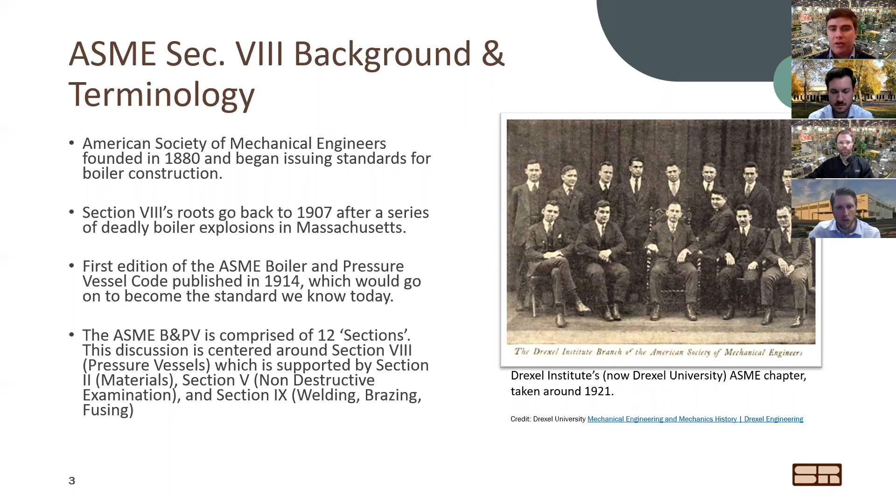So the Boiler and Pressure Vessel Code today is comprised of exactly 12 sections, one of which is Section 8, which we'll be talking about today. And it's all interconnected. There's some pulling in from other sections that may affect Section 8, and we'll touch on that later on in the presentation. Like we just said, here are the 12 sections of the ASME Boiler and Pressure Vessel Code. Section 8 we have called out here, and you'll see that there are 3 divisions within it. And we'll also touch on that as well.

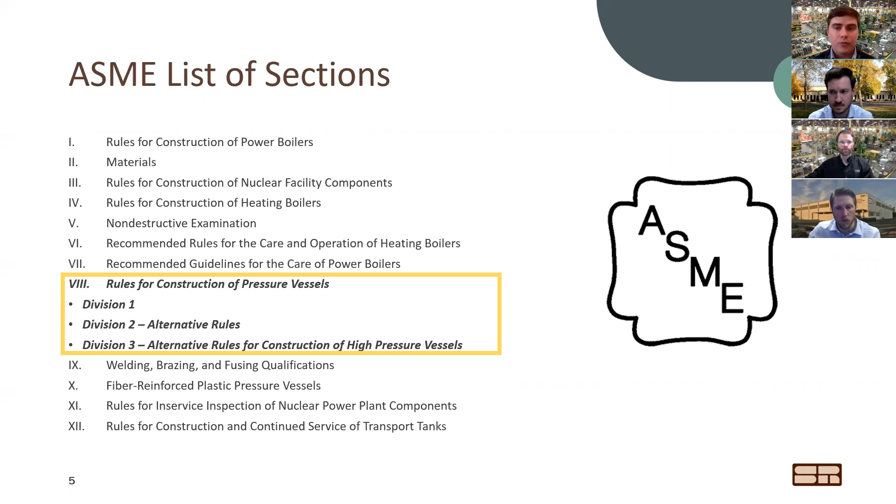So, for this one, I'm going to turn it over to Adam for some more terminology and background. Why don't you go ahead there, Adam? Right. So Nate mentioned that this pressure vessel code has been around for over 100 years now. So it's evolved, and can be considered a mature code at this point. However, they still release editions every 2 years. This allows for new technology and material science, new welding procedures to be incorporated, and also allows them to make any corrections or modifications to the analysis. For many parts of the code, much of it looks the same as it did back in the 70s and 80s as it does now, aside from minor formatting changes.

So with Section 8, we have U and UM stamps. This is on the nameplate of the vessel. Other sections have other letter designations, such as a letter S for Section 1 steam boilers, letter N for Section 3 pressure vessels for the nuclear industry. Right now, our current edition is 2019. The new edition, 2021, is being released in July, which then comes into effect January 1st, 2022.

So for the sake of brevity for this discussion, we're focusing on ASME Section 8, specifically Division 1. Division 2 and Division 3, we're not going to go into too much detail. But Division 1 is a recipe-based set of equations for design. Division 2 gives design engineers more leeway to design around specific applications that don't fit the code as well. And then Division 3 is for high pressure vessels over 10,000 PSI.

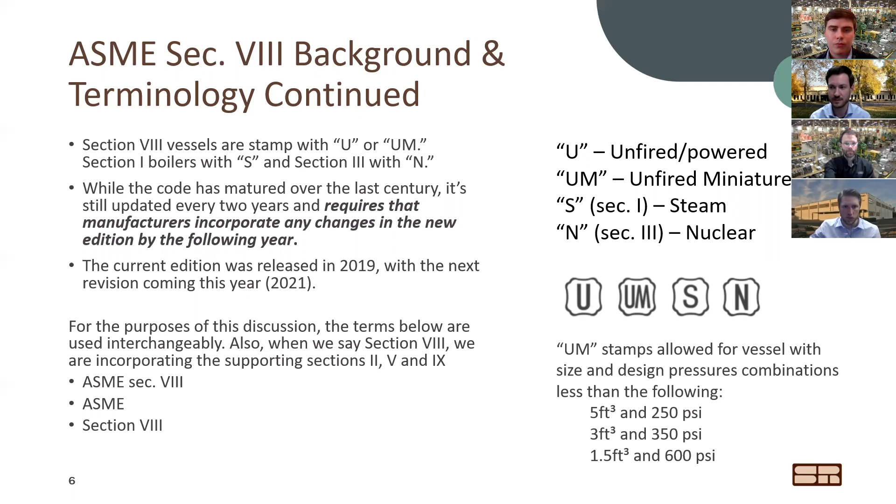So Section 8 is considered the general pressure vessel section, although it's not inclusive. So right off the bat, it goes into details what Section 8 does not cover. Listed here, obviously vessels covered by other sections, so boilers, vessels for the nuclear industry, some other things such as rotating equipment like pumps, turbines, and engines, piping components, pipe fittings that are covered by ANSI standards.

And then if we can focus on the I exemption, vessels having an inside diameter, width, height, or cross section not exceeding 6 inches and no limitation on the length of vessel or pressure. So for us making heat exchangers, the vast majority of our products are outside of the scope of this pressure vessel program. That being said, Section 8 does allow you to stamp a vessel that is not strictly within its scope so long as you meet all the requirements set forth in the standard.

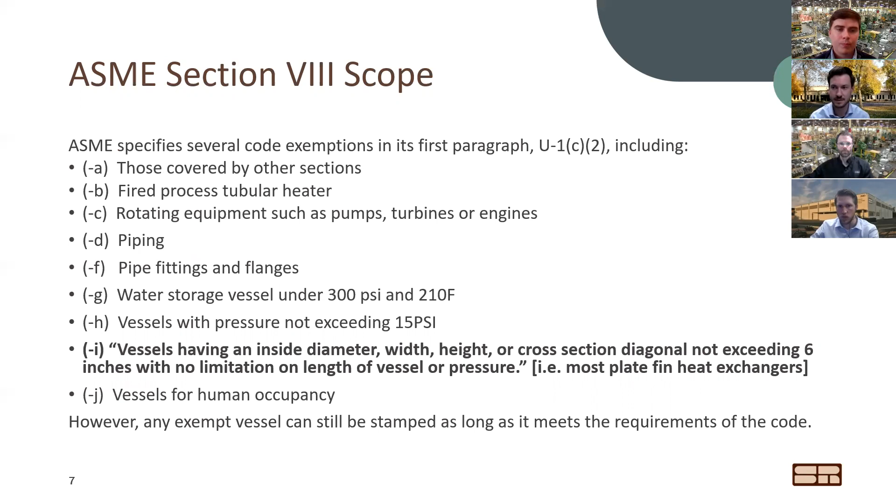Got it. Brian, you want to take this one? Yeah, so strictly speaking, ASME is not a law, but it's common for the ASME Boiler and Pressure Vessel Code to be a flow down requirement from building codes, insurance carriers, customer expectations, or industry standards. So typically vessels that you might see in heavy industrial applications like power generation, chemical process, and pulp and paper is where you'll see ASME required the most often. What we've seen is some military applications on a case-by-case basis will accept ASME in lieu of NAVSEA, TechPub, or mil standard vessels. But it doesn't cover all industries.

So if you're working with HVAC or refrigerated display cases or other lighter duty commercial applications, you're going to see safety standards other than ASME, such as UL, ETL, or CSA. And if you're exporting to other countries outside of the US, it's common to see safety standards in addition to ASME, such as the Canadian CRN. Europe uses the PED CE mark. Russia has their own called GOST, and several others depending on what country you are exporting to.

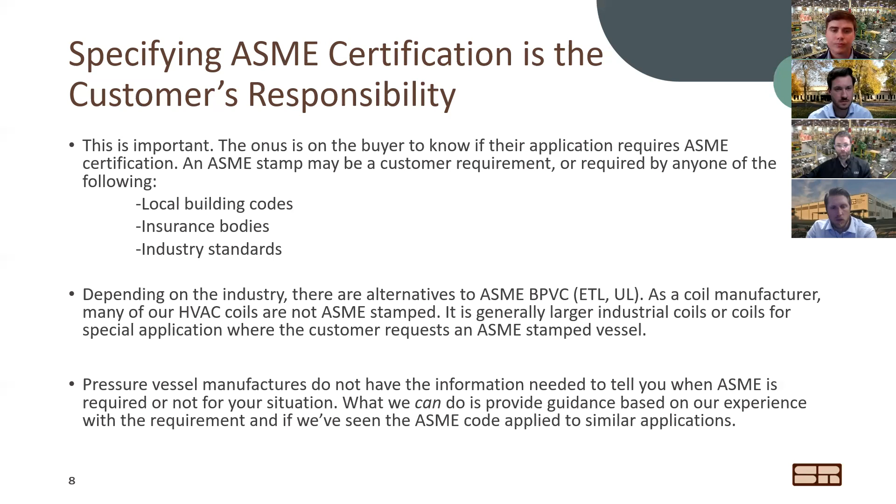So we could use our experience to help you navigate, or at least help you find where to look to see if ASME is a requirement. And we can also give you the information to make a decision if you'd like to include ASME for safety purposes, even if it's not a requirement. Got it. Awesome.

So let's move into it a little bit. We've started the discussion here, but let's talk about specifically what ASME Section 8 is. So Brian, why don't you keep going on this one? ASME Section 8 is kind of like a cookbook of safe design practices. So ASME provides lists of materials that are allowed by code, and it provides the properties of those materials that you can then use as inputs to the equations for designing your vessel. So the materials are kind of like the ingredients, and the design equations are kind of like the recipe.

And by doing that, ASME standardizes the factor of safety in these designs. I think it's approximately 3. I know it changed a few years ago. So we use these formulas to figure out what the thickness of the parts are, hole sizes, hole spacing, the joining processes, any forming of parts, and then also the types of documentation that we need to be able to demonstrate compliance with the program.

Now, every once in a while, you'll run into a specific geometry that's not covered explicitly by the code. There might not be a formula for a refrigerant distributor on how to calculate the thicknesses, or there might not be an explicit formula for a special type of piping flange that's outside of the ANSI flange family. And in those cases, we can use finite element analysis and other means of calculation to demonstrate acceptability of our design to our authorized inspector.

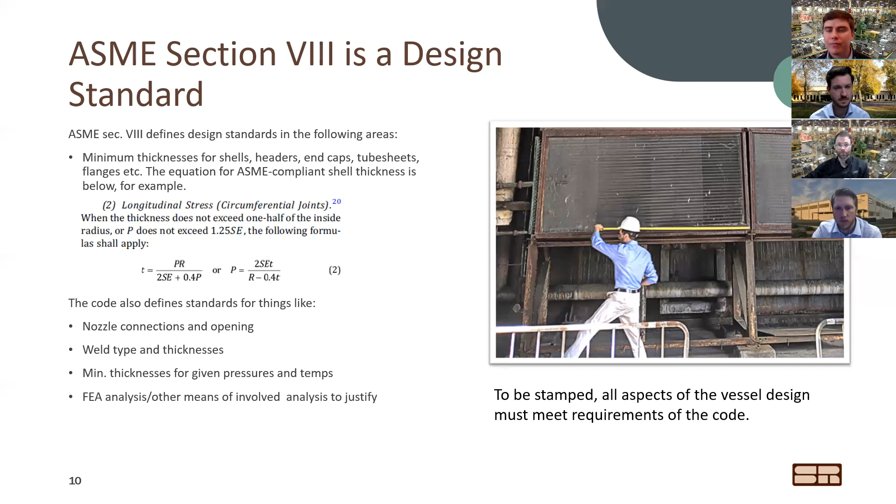Okay. All right. So moving on to the material side of things, Harrison, you want to go ahead and tackle this one? Yeah. So what else does ASME encompass? Any sort of pressure boundary or pressure containing component for a Section 8 vessel must be using material recognized by ASME Section 2. A lot of times these material standards are based off of ASTM, an equivalent material, but it should also be recognized that just because it's an ASTM material spec does not mean it's governed under the Section 2 recognized material list.

And what are you getting when you select a material under Section 2? A lot of times it'll govern things like chemical composition. So if you're choosing a 304L or a 316L material that's easily weldable based on material composition, you're getting things like geometrical tolerances, like thicknesses of plate, roundness of tubes. All those things are really important when you're trying to design a high quality vessel. And you get things like heat treatment, like if you're getting a normalized steel that's HIC resistant or gives it properties that are

more resistant to cracking. You also get testing qualifications, where you're going to have Charpy impact or hardness testing on the material to make sure that it meets the standards specified in Section 2. And as I said before, not all materials are recognized by ASME. And just because there's requirements in Section 2, that doesn't mean that, based on the applications I mentioned before, like a NACE application, there can't also be additional requirements added on to the material specifications.

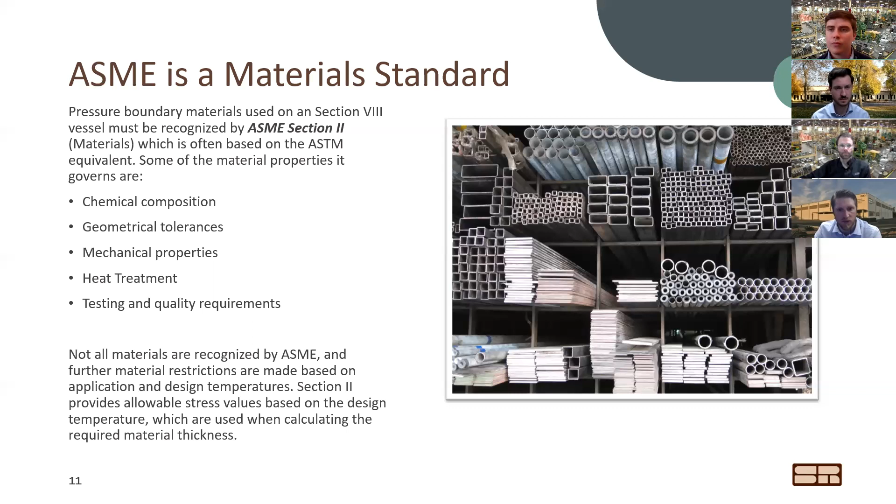For sure. Okay. Harrison, I believe this is in your ballpark as well. Yeah, so ASME is a quality standard. It doesn't only encompass how to calculate the stress, where to get the stress values from, and material selection, but it also encompasses all the processes, including welding. So anytime a worker is doing any braze work, weld work or any other processes on an ASME vessel, they have to be tested and qualified per ASME guidelines.

So they'll weld up a test coupon, and there's numerous different qualifications they'll go through, inspecting the weld to make sure the welder meets the qualities and lack of defects within the weld. ASME also establishes rules for post-weld heat treatment for certain types of welds and certain types of materials. Again, that's to ensure quality of the product and make sure there aren't any residual stresses in those weld joints. And also, depending on the weld joint,

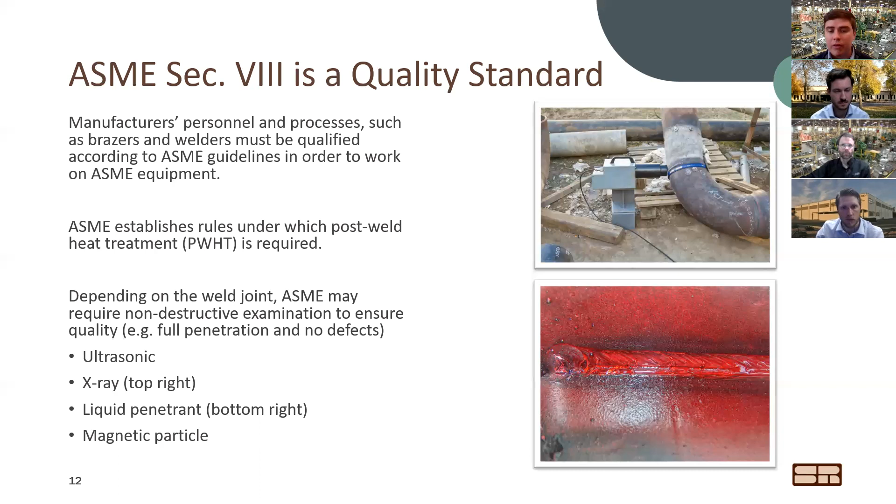Got it. Awesome stuff. Okay, so all that to say, what we've covered up to this point is basically the benefit to, in our case, SRC customers. So Adam, do you want to take this one? I know it's not easy to reduce 1,600 pages to 2 bullets, but this is our best shot. Well, exactly. So Brian discussed how ASME regulates the engineer's design of the pressure vessel.

Harrison discussed how the material, the supply materials, and then the joining practices, the manufacturing, and this inspection is all carried out. To what end? Well, essentially to reduce the risk that there's a failure of a pressure vessel, which can cause harm to equipment or personnel. So that's the primary function. It's why ASME was created, to reduce the risk of a failure.

Now, also an advantage of that is it increases reliability. So if an owner-operator has a critical component that, if it fails, shuts down the whole production line, well, that's a consideration that some people will put into play to require ASME stamping of a pressure vessel, where it otherwise may not be required by code.

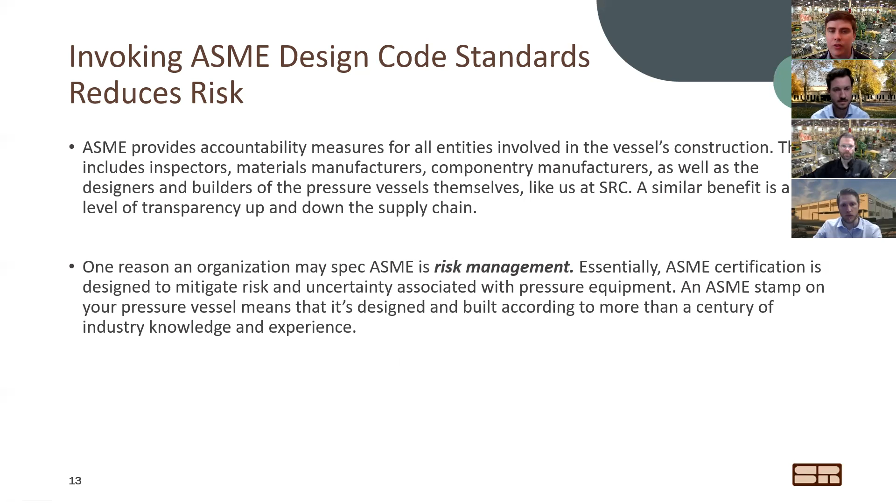Got it. Okay, nice. So we've outlined what it is, and then all of the pieces that go into it. But there's also an equally important discussion to have as to what ASME does not cover and what it doesn't pertain to. And so for that, Brian, this one will go to you. Just the fact that it's a non-industry specific standard and maybe some examples.

Yeah. So we touched on a little bit of this. ASME is not specific to any one industry. It's an independent body that provides safe design rules for pressure vessels. So for specific applications or some other customers, we might see standards that are applied either in addition to ASME or instead of ASME. For example, TEMA entirely addresses shell and tube heat exchangers. We see it applied somewhat to our air coolers, and anytime that we have tubes coming through a tube sheet, that style of manifold will often reference TEMA as a technical standard.

API, same kind of deal, specific to oil and gas. It gives guidance also on welding and material selection and safety. If you get into some military applications, you'll see NAVSEA, MIL standards, tech pubs, etc. And one of the really useful things here is that even if ASME or one of these standards is not explicitly required for your project, they are available as a technical reference, and we use them often.

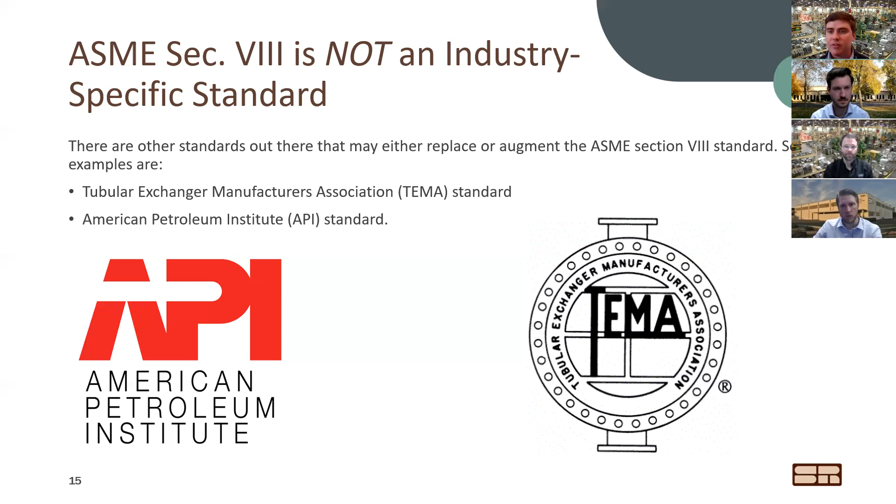For sure. That kind of speaks to it being a living, breathing entity. It changes frequently. It often pulls in from all these other places that we've covered. There's a lot going on, suffice to say. And then on the legal side of things, Brian, if you want to stay on this one. Absolutely.

Yeah, so, in the U.S., and I think abroad also, ASME is not a legal requirement. It's found as a flow-down requirement from building codes or fire protection codes, insurance carriers. It's different, actually, in Europe. Europe uses the CE mark and the Pressure Equipment Directive, and that is required by law. So that's a national standard for them. For us, it's required a lot of the times on these big industrial applications through these sub-tier flow-down requirements.

So kind of an important distinction to make here. We've got two bodies, right? We've got ASME. ASME provides the rules for constructing a safe heat exchanger. And then we have the National Board. These two bodies are by and large independent. The National Board is the enforcement. So Super Radiator as a company went to the National Board with our quality system, and the National Board reviewed our quality system, and we were able to apply to get these authorizations to mark. We call that our UM stamp, our U stamp, N stamp, S stamp, etc. So that's provided by the National Board.

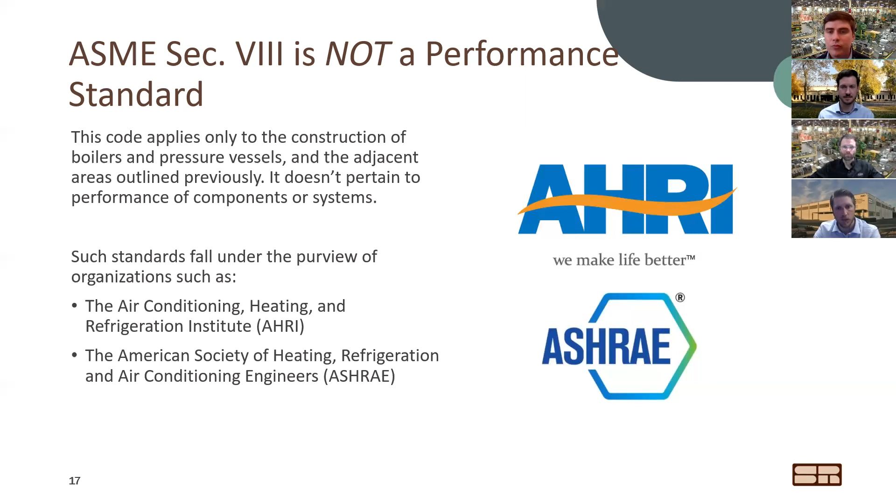So I think that's also an important thing to note, is that just because your vessel has an ASME stamp, that doesn't mean it's going to work right for your process. It just means that it's been constructed to those standards. So I think it's a really important note to have. Yeah, absolutely. Totally agree.

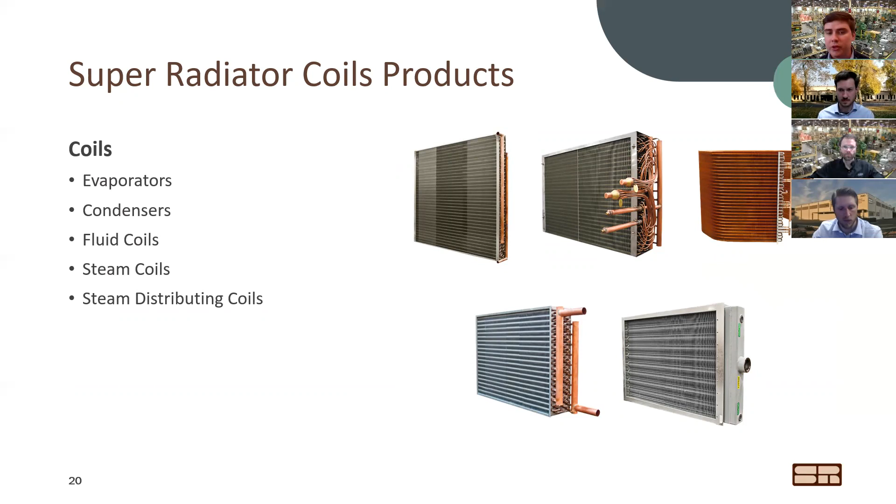And then on the more specified niche stuff that we do is nuclear products. And there is an ASME code section that pertains to this as well, section 3, I believe, if I'm not mistaken. And these are all safety and non-safety related heating and cooling applications for nuclear power plants. Some pretty cool stuff that they do up in Adam's location.